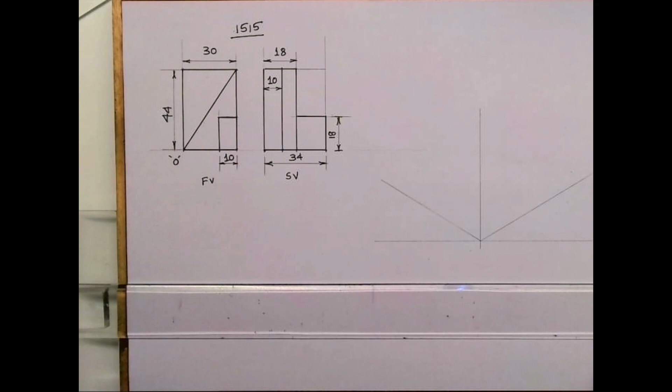Welcome to Technical Drawing. Today we'll see this sum in isometric. If you see in this sum, length is 30, on the right side 30, height 44 and width 34. So we'll draw the layout like this.

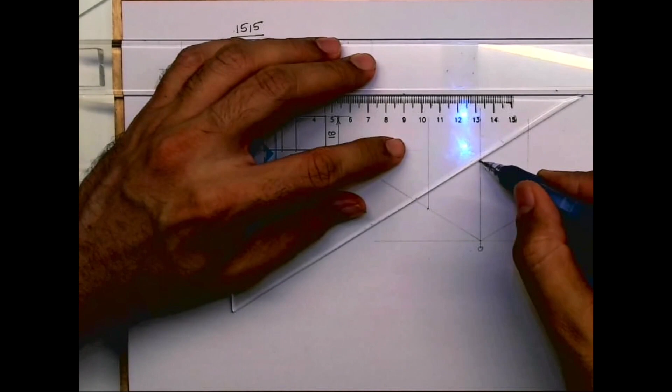After drawing the layout, now if I see the side view and front view, there are three parts. See, here it's 1, 2, 3, and here it is A, B, C. Now it is not very clear which one I should draw first. So what I'll do, I will draw 3 boxes. And I'll try putting them one by one.

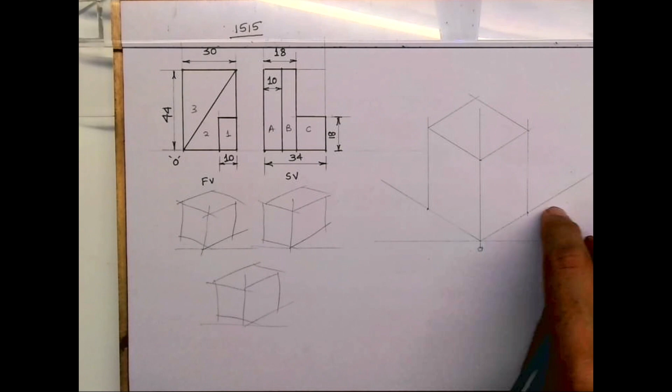Let's say part C. In this, part C is here, part 1 is here. So I'm putting part 1 over here. Part 2 over here. I'm assuming that part 1, part 2, part 3 is nearer to me. And whatever is there in the front, the same thing is behind. With that concept, I can draw this.

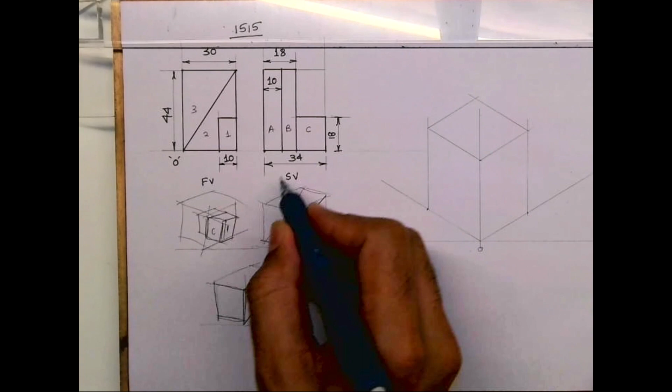Part 3 is the upper one. Yeah, the upper triangle. So it will be like this. Now I need to see in the side view where it is matching. So here C is matching with 1. Right? 2 is matching with B.

That's the slope. Right? And here this is matching. A is matching with 3. So first we'll start with C and 1. So see, in such kind of question, always go with this possibility.

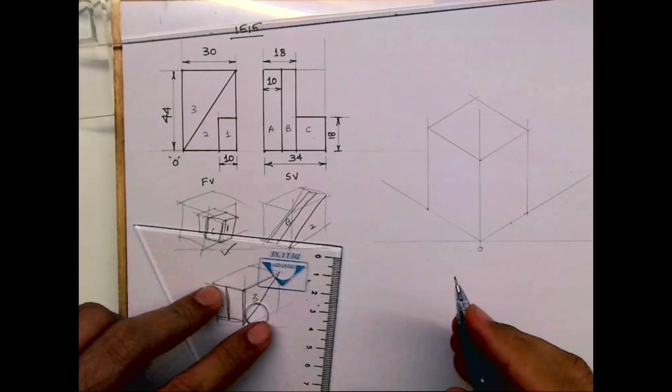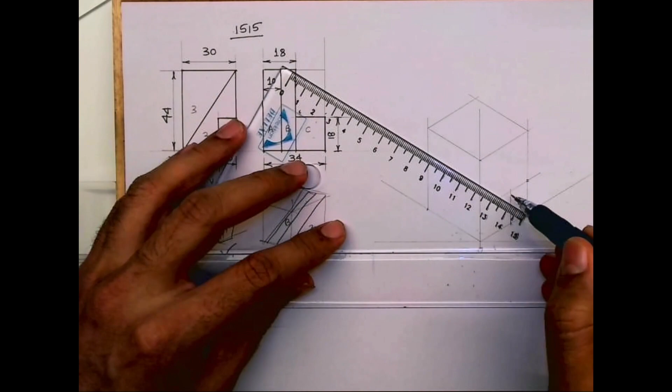So see, we got part 1. Now take this behind. How much do you have to go behind? 34 minus 18. So we'll get this part. So we are done with part 1 and C.

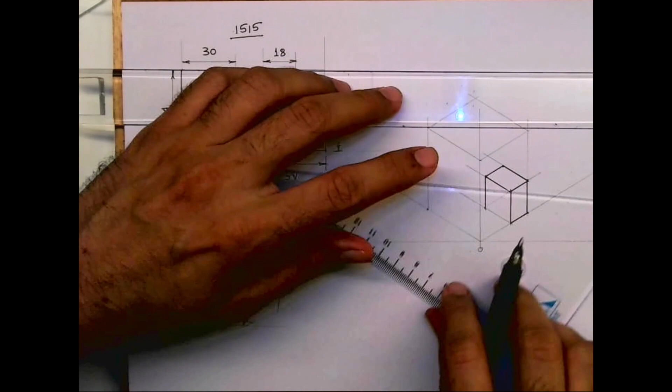Now we need to draw part 2, which is B, right? So for that I will draw a vertical line from here, an inclined line from here, see, like this. So we'll get that slope.

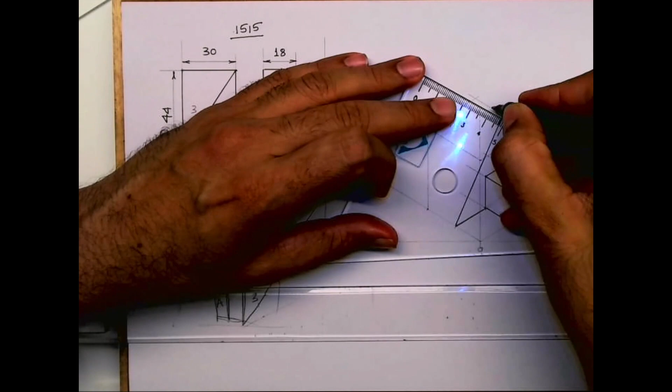Then from here I'll go inside. How much do I have to go inside? 8 mm, because 18 minus 10 is 8. Then we'll draw a vertical line from here, an inclined line from here.

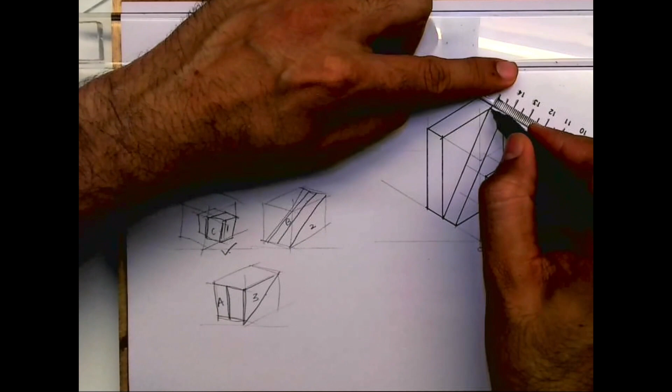This is part A, 3, right? So I hope everyone understood this sum.